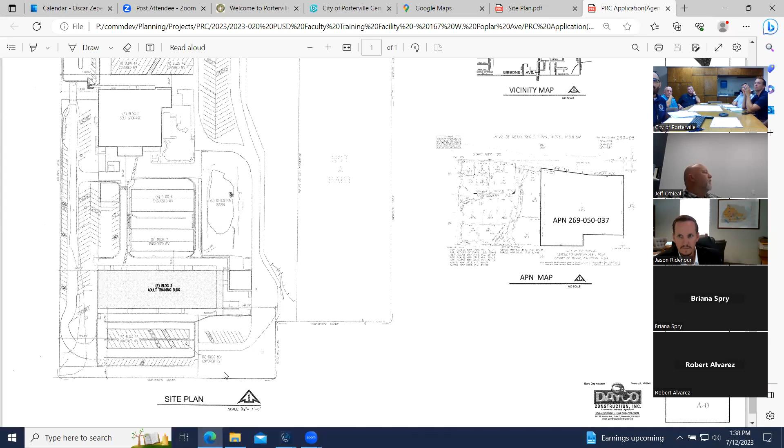As far as... wrong labeling, there it is. Yes, as far as the tenant improvement being proposed here for building number 2, it's for an adult training building for the Porterville Unified School District, is our understanding.

As far as a floor plan, there has been submitted more or less a two-phase, or phased, improvement to the existing building. Comments from planning are in relation to the use. The proposed use falls under office uses, which is a permitted use within the general industrial zoning district. It looks like the development is going to be just tenant improvements, no expansion of floor area.

Our comments are in relation to any expansion in the building. Any new development would have to comply with our development ordinance, which is chapter 21 of our Porterville Municipal Code. Also, any required parking for the new use, making sure we provide one parking space per 250 square feet of new office floor area. Any future signage proposed with the project must comply with section 305 of our development ordinance. And again, any new parking that may be established must comply with section 304.10 of our development ordinance, which is our parking standards.

And again, that's pretty much our comments from planning, pretty standard here on the proposed use. At this time, it is our understanding that the use would be for this building only.

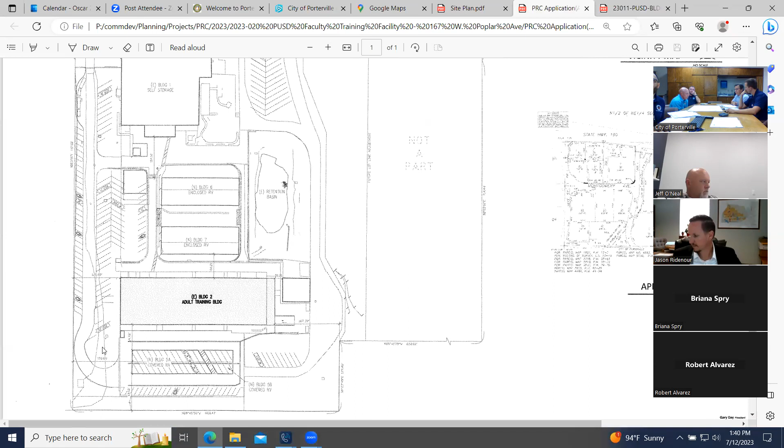With that, I'm going to go ahead and pass it along to our building division with James. So, yeah, being that it's a permitted use, we would just fall back to plan review for anything that might get caught then. It looks like you've got plenty of exiting, and it's already sprinklered, so I don't have any comments at this time.

One of the things I was thinking - can I talk now? Yeah, go ahead. Okay, one of the things is, correct me if I'm wrong on any of this, but this is what PUSD is going to occupy for phase one, but all of this is still mini storage, correct? Yes, for now, all of this will remain as mini storage.

So even though we're sprinklered, for phase one, are we going to be required to do a 1 hour occupancy separation to meet this, or no? No, we looked it up earlier, and there was no separation required. Okay, sprinklered, okay, perfect.

Thank you, James. Next with fire department, with Clayton.

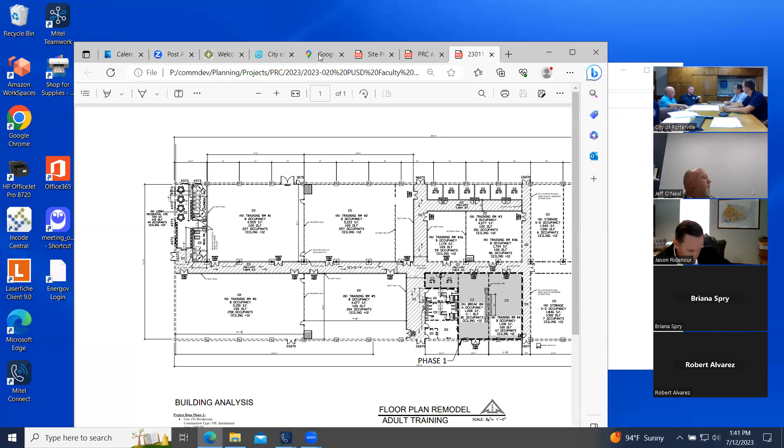Basically, any changes to the occupancy from what it's going to what it's gonna be. I don't think there's gonna be much with the sprinkler system, but there may be some with the fire alarm system, initiating devices, notification devices. So you'll want to have that reviewed so we can look at that during the plans review process, to make sure that if there are any changes in the system based on its proposed use or the new use, we catch those things and get them done during construction.

But other than that, again, it's a sprinkler building. I don't remember the exact layout for all the horn strobes and pull stations and all of that, so based on the fact that we're changing this and bringing more people in, we want to make sure we provide a fire alarm plan.

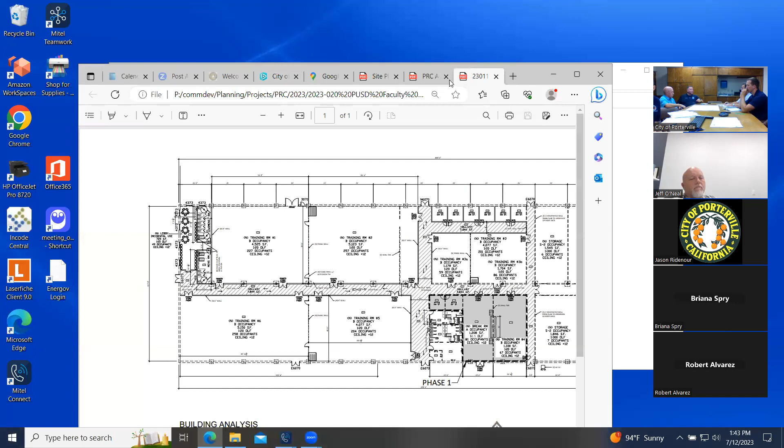Potentially have it reviewed. If the review shows there's no required changes to what is existing, you'll just provide that during the plans review, that this XYZ company looked at it, reviewed it under the occupancy change, and there's no required changes. We'll review it for clarification and let you know. And if there are changes, that'll be the opportunity for them to provide the plans showing what needs to be moved where, and we're gonna do it.

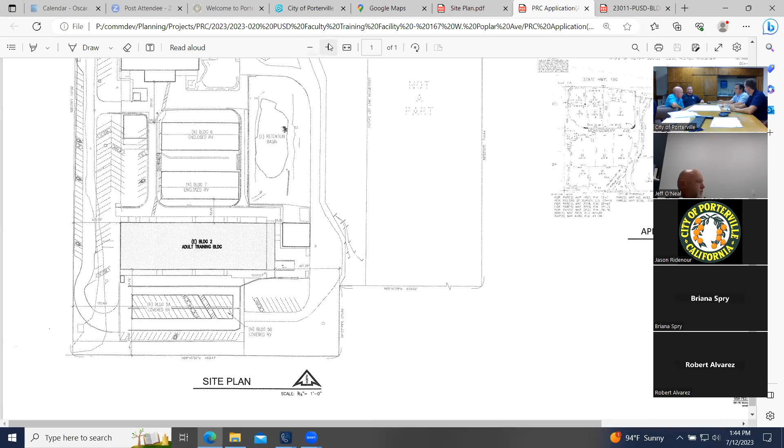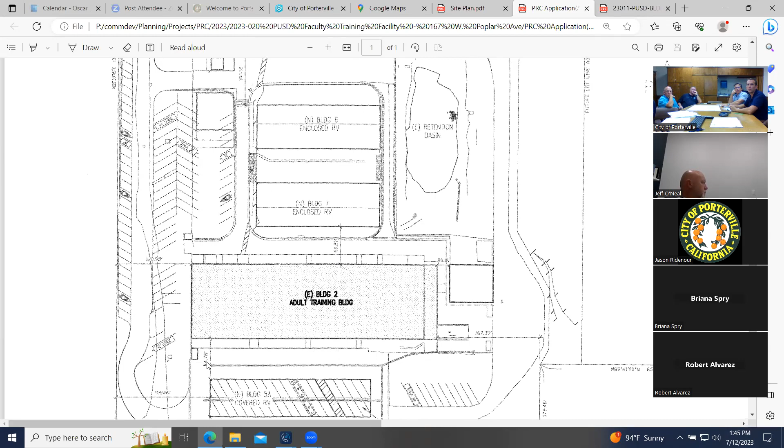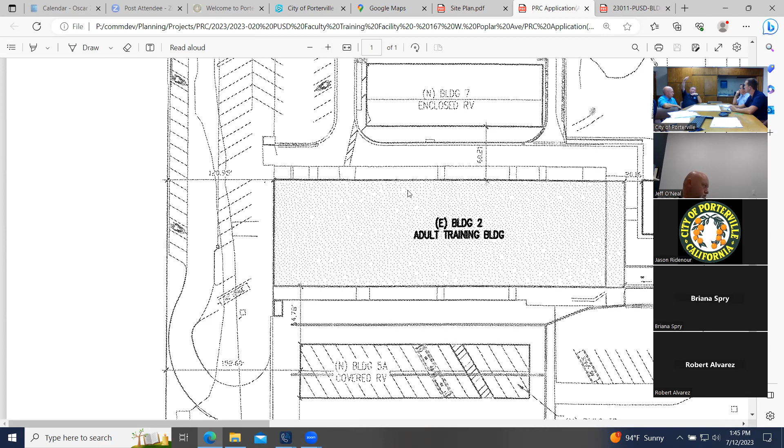Is it gonna be between those buildings, 2 and 7? No, on the other south side, the back side. Yeah, right there. We probably got 50 feet between there and the canopy, but those RVs need more room than 20 feet to get in there. Well, yeah, just keep the 20 feet from the canopy. That'll give us the room on the other side and we have access right there, which keeps us out of the collapse zone if the building's on fire.

We're below 25 parking stalls required for this, so we won't have to do EV or any of that. It should just be accessible, one accessible stall, maybe two, plus that'll probably come in phase two for sure.

And then we've already got, I think this already has an accessible path of travel to the building from the public right of way. We have one on the north side coming through, and it all connects, all the way from all those buildings. Yeah, cool.

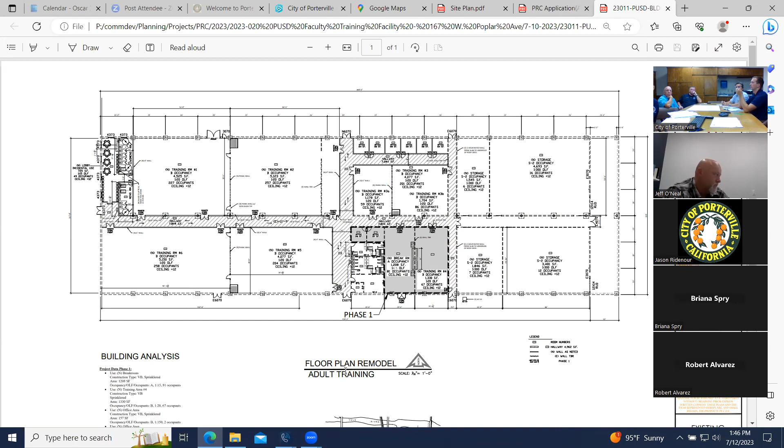You will need a 3-bin enclosure for the trash service, which should have been included during this whole process but got missed. So Briana, they just need one? I would probably do maybe 2, like one on each side. What is the total occupancy going to be at when you guys are fully done?

This is another year out, a year and a half probably, before the work even starts, because it has to dovetail after the other project is completed. So maybe put one in now with phase one, and then it can be reassessed during phase two. Yeah, I would go with that.

Any specific location? It just has to be a direct stub. I know there's a couple bins already out on the north side, kind of right there.

They're not in an enclosure. The issue is we've got to have a path of travel to that as well, no? Yes, I believe so. We can talk about that after. We're working on a couple other jobs.

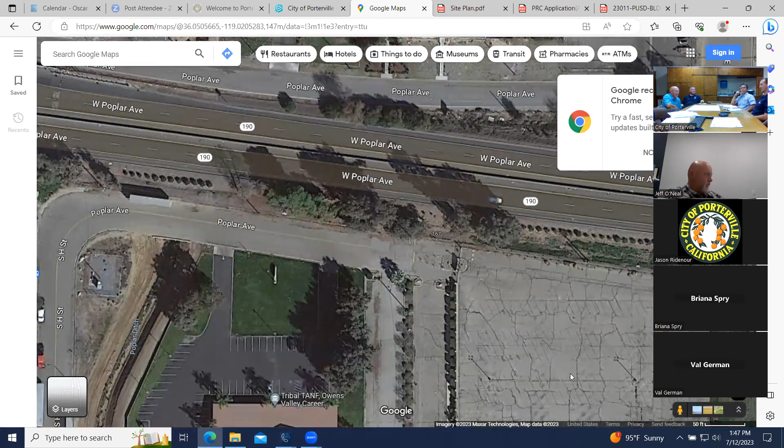Is that where you would want it, Briana? Or do you want it closer to the building itself? Well, that's kind of a long way to walk for whoever's taking the trash out.

Used to be right next to building number 1 on that northeast corner. Used to be one right there on the opposite corner of that building also. Does Wade currently have a landscaper do all the landscaping?

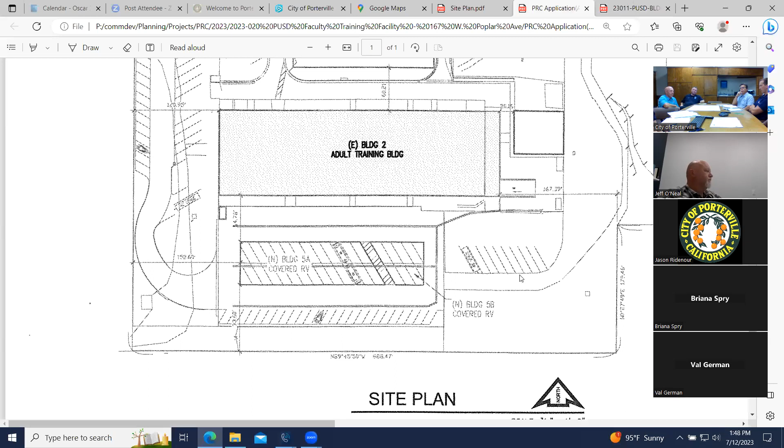I don't know, because we could apply for a waiver. You still have to build the enclosure and have space for the service, but you can have a waiver as long as there's no landscape or kitchen or cafeteria in there.

So say they want to do maybe 2 black bins and 1 blue. And then if anything ever changes in the future, you can go to 1 of each, if landscaping comes in for some reason.

But the state wants 3 bins built, or 3 enclosures built, no matter what. Are there 2 large ones and then 1 small one? No, they're all the same size. Really? The enclosure gets larger if a 6-yard bin is requested.

Then the width stays the same, but the depth is 2 feet deeper. Right, Briana? Yes, you're right, I'm talking for you. You're fine.

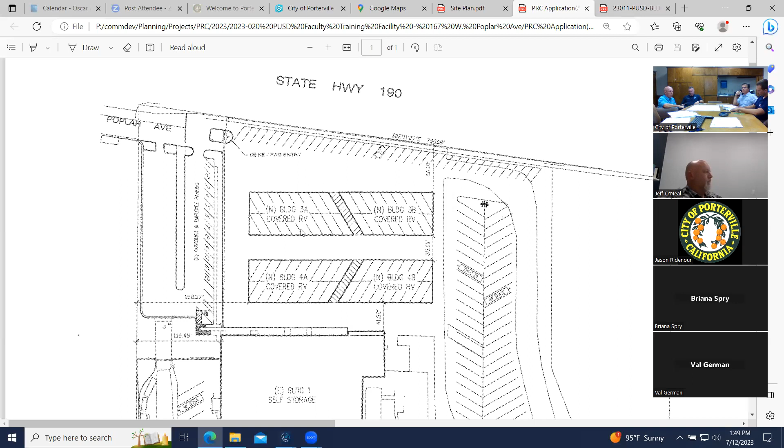Just to comment on that, previously we've seen more recycle bins going in than the black, so we could definitely accommodate 2 recycle bins, given the amount of paper products going through the facility.

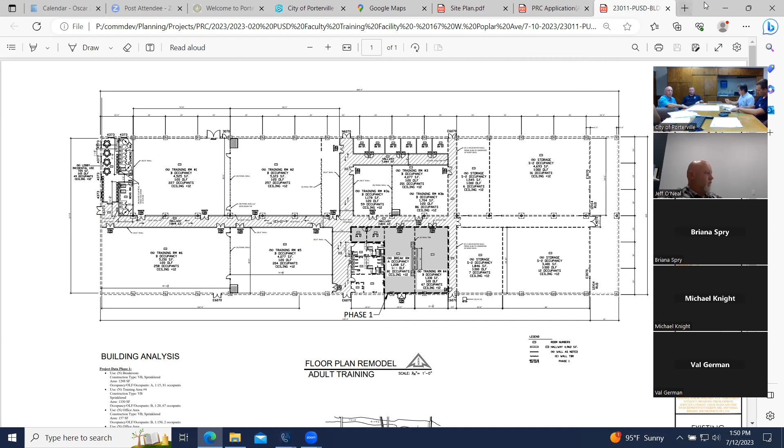Sounds good, thank you Briana. Next with Javier Sanchez, engineering. Thanks, Oscar. Specifically for engineering, we won't have comments, just some brief comments to building and public works.

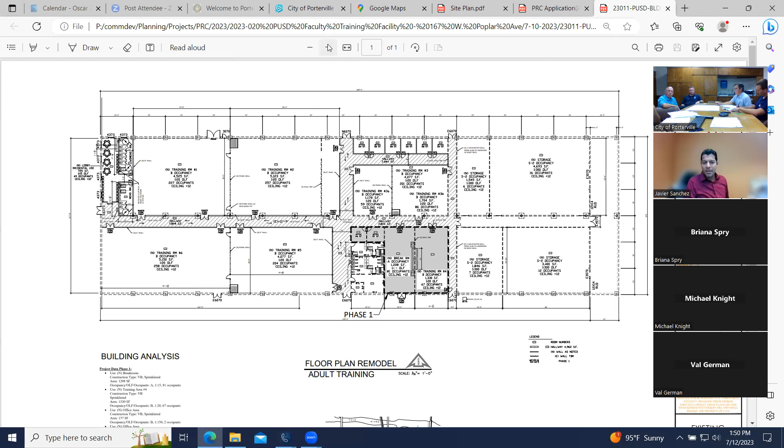On the building side, are those restrooms existing? Some of them are. The restrooms in the center of the building are existing. The restrooms on the far northwest corner are future, but they may relocate.

I'm not, this isn't set in stone yet. The footage is, and we just kind of showed it as an option, but we have to design the restrooms to fit the occupancy load. So we may relocate those, but we definitely have to consider that they're compliant, obviously.

Yeah, so that'll just be something during the plan check, just checking for compliance. And then with the increased occupancy, we'll just monitor the flows, and that just might affect their utility bill, but it shouldn't be too much. Okay, but besides that, there's no comments from engineering.

Yeah, and those existing restrooms did get upgraded during the storage remodel.

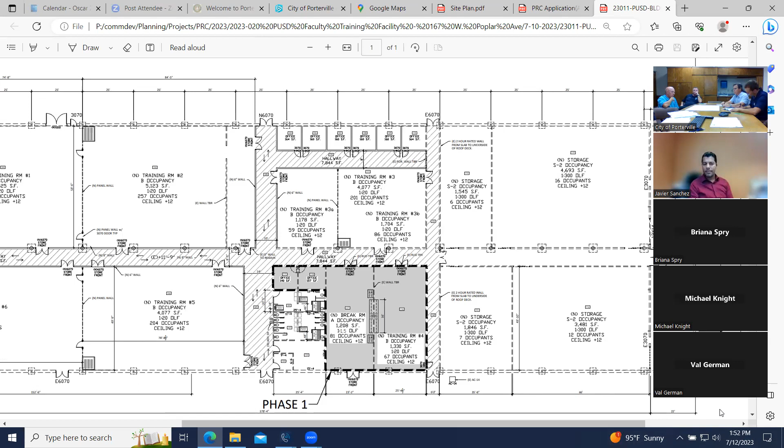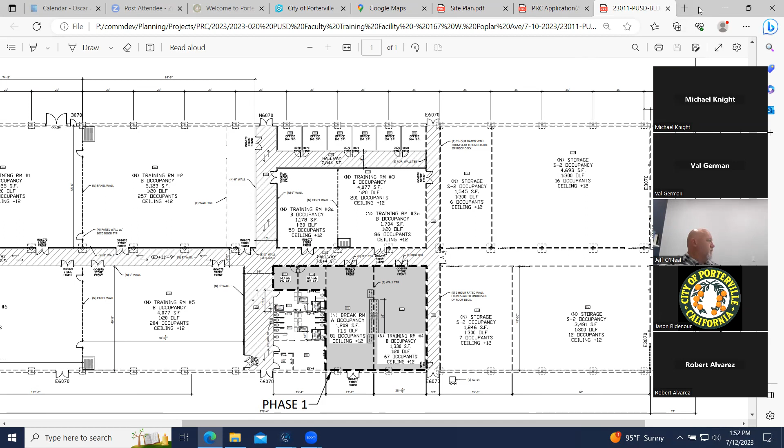Oscar, just need to make sure that we have backflow devices on water service and fire sprinkler systems, also a separate meter if required for landscaping. All the backflows were just replaced, they're all installed. And when we go up to the pressure test.

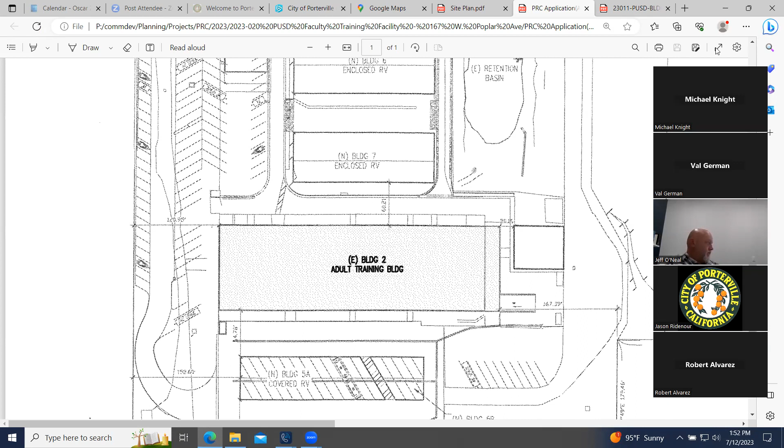Just to add on to Robert's comment, review the second part of his statement. So any landscaping needs to be fed off of an additional meter. The purpose is to save you money. If you just have a single meter for domestic use and irrigation, you'll see additional costs based on consumption towards sewer contributions. So for any irrigation demands on the property, it would be in the best interest of the owner and operator to have a separate meter to reduce additional sewer utility costs.

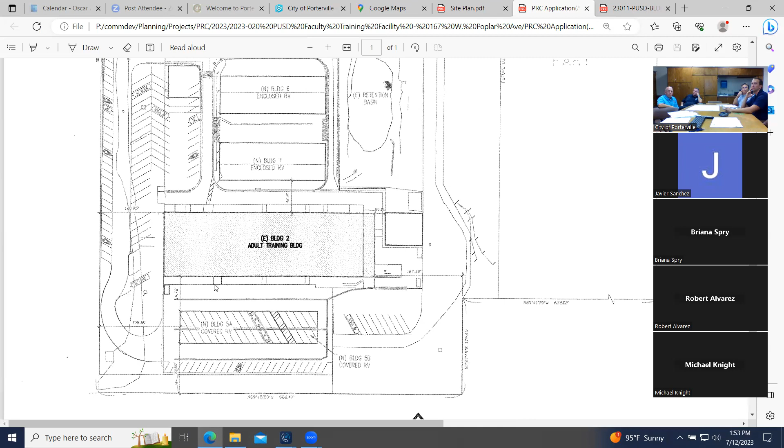And then the only other comment I have is down in the bottom left-hand corner, you have it identified, but sewer lift station number 10 is how we reference that. There's a sewer lift station in the bottom left-hand corner of the property, in the aerial map you had up just a second ago, Oscar.

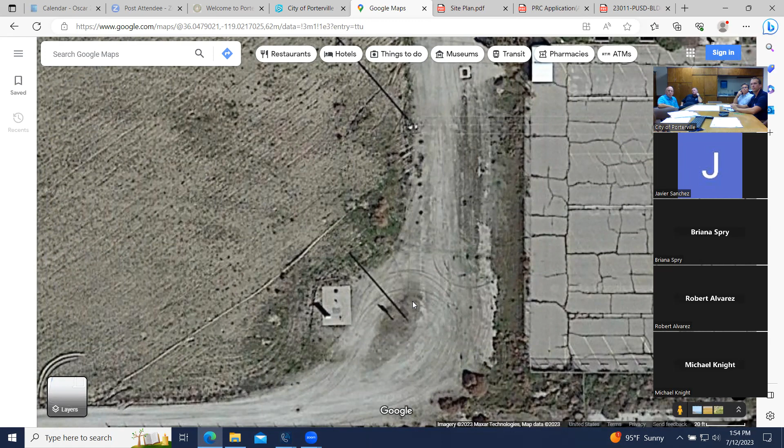So right there on the left-hand side of the parking lot, you'll see that little slab. That is a submersible lift station. The city needs to maintain access to that, and we are there weekly depending on any issues. Previously we accessed that from the access road behind it. Since then, the property has been fenced off and gated off, and so there's been some challenges for us to gain access to the property. So just keep that in mind as it continues to develop.

Okay. You think that irrigation is something we could do on phase 2, so that we're not... Yeah, the landscape. Yeah, they're not interested because they're gonna be tearing all that out. Right, probably landscape. No, not at this point. I'm just saying when they do phase two is when they're gonna want to do the landscape.

Hey Mike, that separate meter, is that something we can do later when we get to the more extensive remodel and change of occupancy, like phase two, or are you asking us to do that right now in phase one? I just think it needs to be said now. I don't think it's contingent on permit approval, but the reality is, our first reporting, it's a DWR requirement. DWR has implemented legislation requiring the city of Porterville to monitor consumption based on uses, whether commercial, industrial, institutional, even down to multifamily—we're going to have to monitor outside use and indoor use. So it's just getting ahead of the curve rather than coming in and doing it as a change item later. We try to address it in this format because we don't want to come in a year from now and say you have to redo all your landscaping. It shouldn't hinder the project moving forward, but it is going to be a requirement.

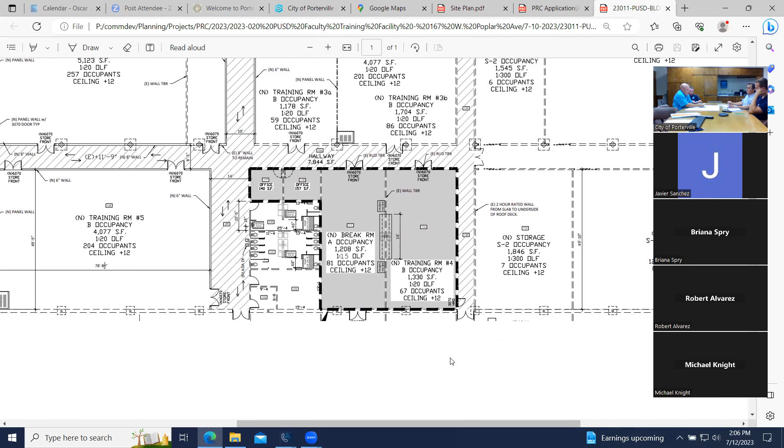What is that, 6'3"? Yeah, it's a 3-foot door. We got - yes, we got 3 feet. We would just have to check chapter 10 on that, maintaining that width for egress width, yeah, we will.

If not, you might need to just build a little alcove here. Right, it may not be a bad idea, just to keep it out of the hallway, so that way people aren't getting smacked by the door.

Are there any electrical or lighting upgrades? This room, there's none. This room, we had to add a few lights because they had a lot of can lights in the ceiling and a couple fans, so we're gonna replace them with LEDs. This room here is fine, the way it is.

Okay. All right, oh good, thank you.